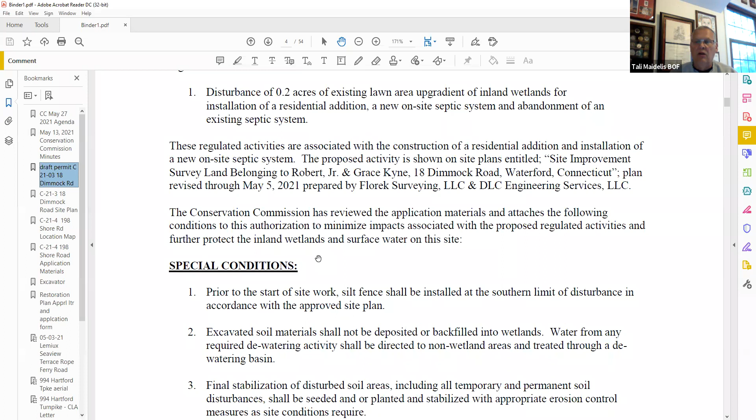Sensing the commission might be ready to vote, would somebody like to make a motion? I make a motion to approve, the finding is made. I second that, Geneva. Second by Geneva. Discussion? Sensing the commission is ready to vote, all those in favor signify by saying aye. Aye. Opposed? Abstain? Motion carries.

Thank you. Going to the next item, C-21-04, 198 Shore Road, stream channel stabilization.

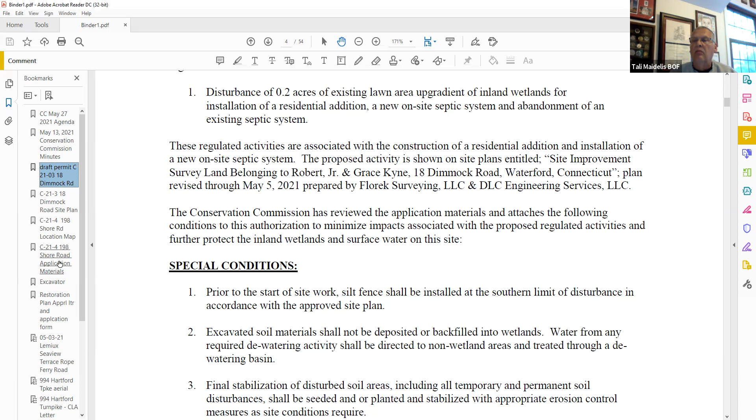Staff had prepared, after some site visits and speaking with the applicant and the applicant's agent, comments. Did they get these? Yes, that should be in your packet and the meeting materials. They were just from yesterday because my last site visit was that day. And I got to speak with Mr. Lombardi some as well, so I put together some comments for the commission's consideration.

And for the applicant, I believe Joe, are you here tonight? Yes, I am. Joe Thoreau is the agent for Mr. Lombardi and the stream stabilization application. I told him I didn't expect him to have answers this evening, but for the commission's discussion, I wanted to at least give those review comments.

Go ahead with this one. The review comments, and if they have any others to add based on their independent reviews of the application material. Are there any commission members with any additional comments or questions?

If you haven't had a chance to read it, hang on. No, it's under control, I want to make sure I have everything here. I haven't had a chance to read that. Well, I don't think I found it in my packet. No, I haven't read it. I don't have it in my packet. The packet was the attachment to the agenda and the meeting materials. That came later. Oh, okay.

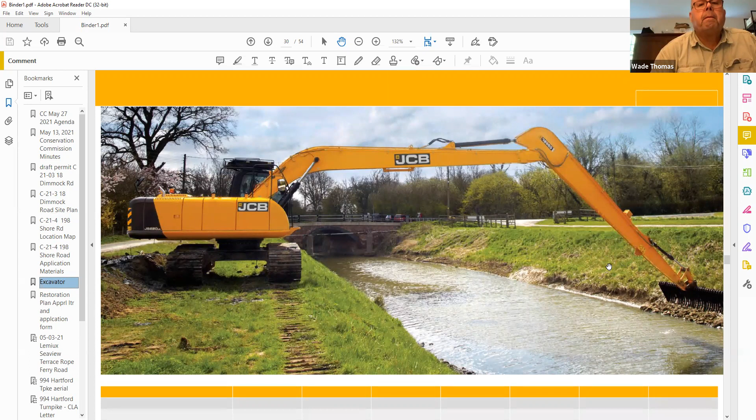I don't know if you can see - okay, can they see that other part? They'll see that. Okay, so you can see at the end, it's articulated, made to reach, and then they can shake out the riprap. And in fact, this photo isn't really reflective of what he has on his property, because the slopes are much steeper and the undercut is a little more pronounced. But if you haven't had a chance to go out there, I think this helps a lot.

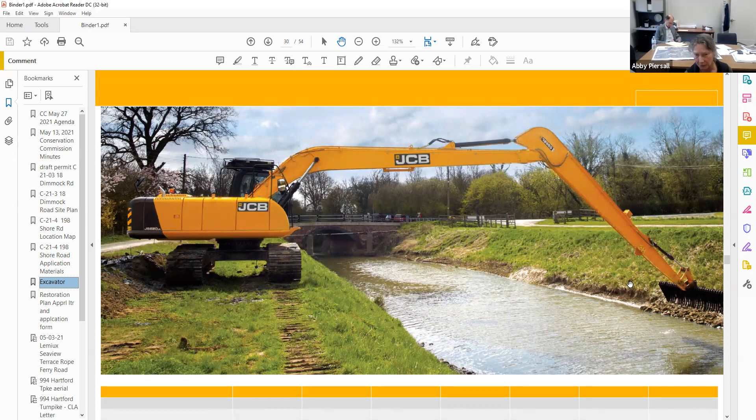His intent is to just work from - do we have the map, Ken? Yes. Right here? Yeah, right here? No, that's the location. This one? No, that. Hang on, scroll down. Operator error.

This was in the original application, but when you get to see the plan, which is at the very end, you can see from some of these pictures that we reviewed last meeting. It's tough in there, so they're going to be clearing on the south side and reaching across. This is the north side, this is his lawn, this is the area. It's all overgrown with honeysuckle, grapevine, and bittersweet.

That's up by the driveway, the wall he wants to repair. But here you can see where that will be reached in. This is that northern steeper embankment. See, it's a little more pronounced, the undercut there.

I would just want to clarify that these trees will be left, and they can, if they're working from the other side, reach in here. So it's just a matter of documentation, so if the commission wishes to go forward or has some conditions, it's better understood what the regulated activity is. And I've spoken to the applicant and the agent.

So this is the south side where they want to clear everything down, be out staging the machinery here, and reaching across, not having to traverse up and down this slope. Now, again, if I've misspoken, Joe, I'd like to turn this over to you so you can underline any points with the commission. I'm not expecting answers off the fly this evening, I realize I just got you these comments.

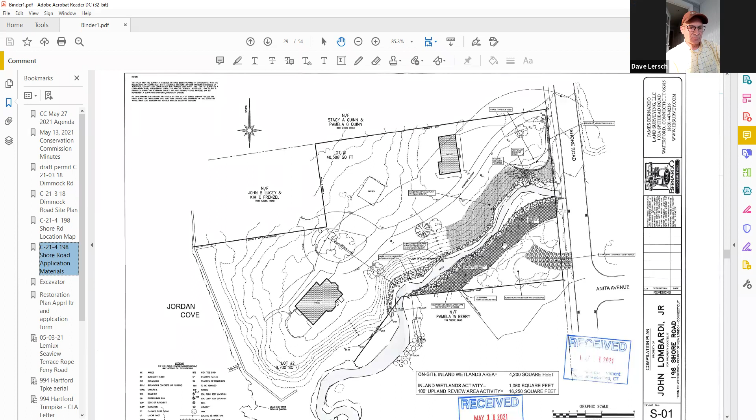Is that acceptable to the commission? Sounds good to me. Can you say that again please? We're going to continue this until the next meeting so the commission members can read your letter, Maureen, and the applicant can respond to your comments.

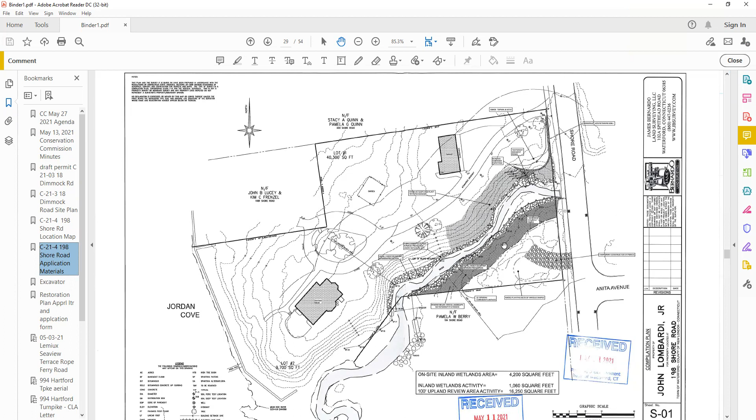The only thing under item 6, other businesses, was a plan submitted for where the Yoast application was approved in 2020. I would still need at least a quorum to review that. I would entertain a motion from somebody to move item 6 to before the executive session.

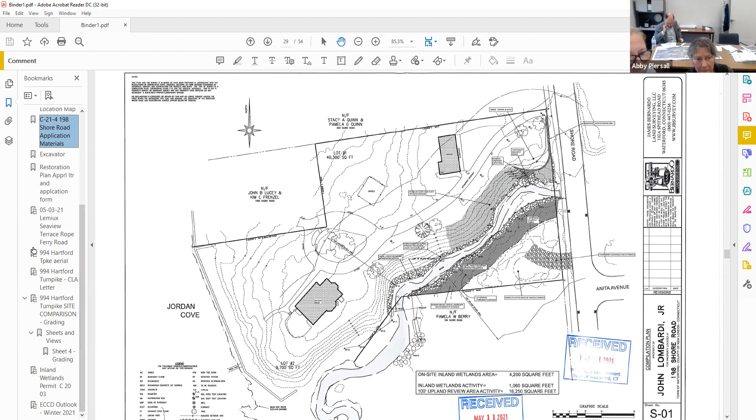All right, the first item is Rope Ferry Road, Seaview Terrace. That's just the correspondence item. There's 3 years of monitoring reports required. This is the second year. I just wanted to share that with you.

The next one is 994 Hartford Turnpike. This is just for the commission's review. Here's the town transfer station, used to call it the Christmas Tree Farm, on Route 85 right here.

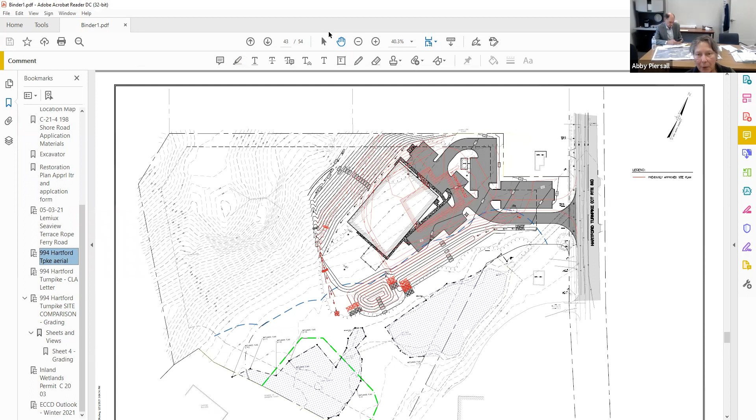There was a permit issued in C-2003 for industrial commercial development of the property. That has since been sold to someone else. The engineer wanted to see, staff concurs, but I want the commission's review and concurrence as well, that this proposed plan, although the use is different - it's not light manufacturing anymore, it's a school and offices - is consistent with permit 20-03.

What you see in red is the limits of grading and clearing that was approved under 2003. Let me blow that up a little bit because apparently I'm colorblind. There you go. So the red was the limit of grading. To accommodate a little more parking, the limit of grading has been moved 5 feet closer to the wetland. It is still outside the tree line, still within the Christmas tree farm.

The functional design of the basin is the same as what was approved in 2003. The discharge locations are very similar to what was approved in 2003. The applicant's engineer would like to know if the commission would find this plan consistent with the existing permit, or should they come in for a new permit?

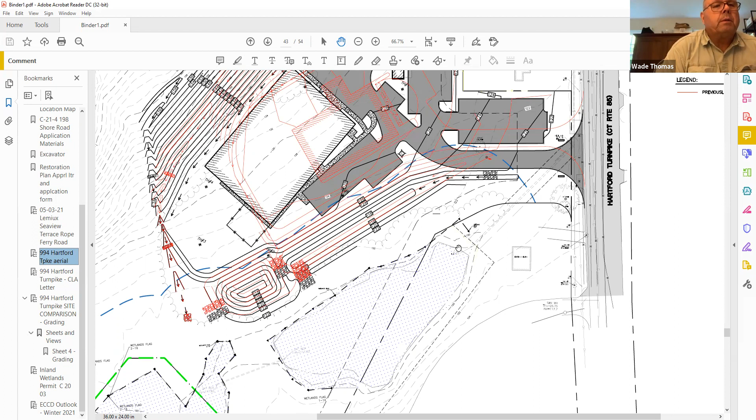Staff found, and the wetlands agent that works with CLA engineer, Mr. Bob Russo, also submitted a supplementary report to the P&Z application that this doesn't change anything with the wetland impacts, which is really the concern of the commission. Any other comments by commission members?

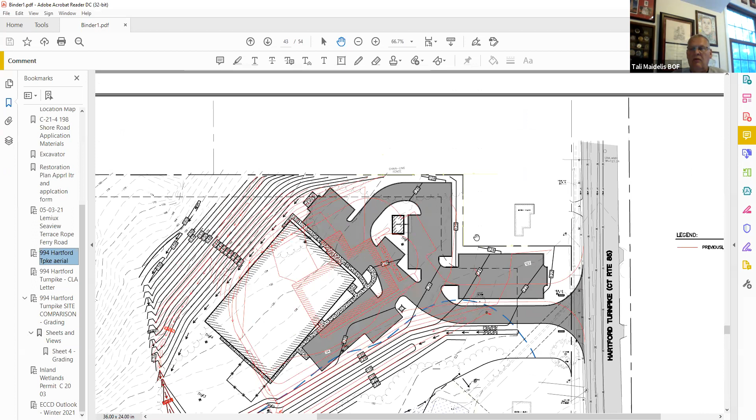Wade, would you like to make a motion? Yeah, I'd like to make a motion to accept the revision as proposed, and there's no net change really in environmental impacts. So that motion would include the finding that the proposed development is consistent with the terms and conditions of C-2003. Correct. That's what I thought you said. Yes. Yep.

I second that, Julie seconds. Any further discussion? Seeing the commission is ready to vote, all those in favor signify by saying aye. Aye. Aye. Aye. Opposed? Motion carries. Thank you.

Okay. Violations we can do later, right, Maureen? Yes, there's no report on that.

I'd like somebody, I guess, Wade, as I remember, you have to recuse yourself, so good night, everyone. Good night. Okay, Ray. Aye. Take care, everyone. Have a good holiday weekend. Take care. Same to you.